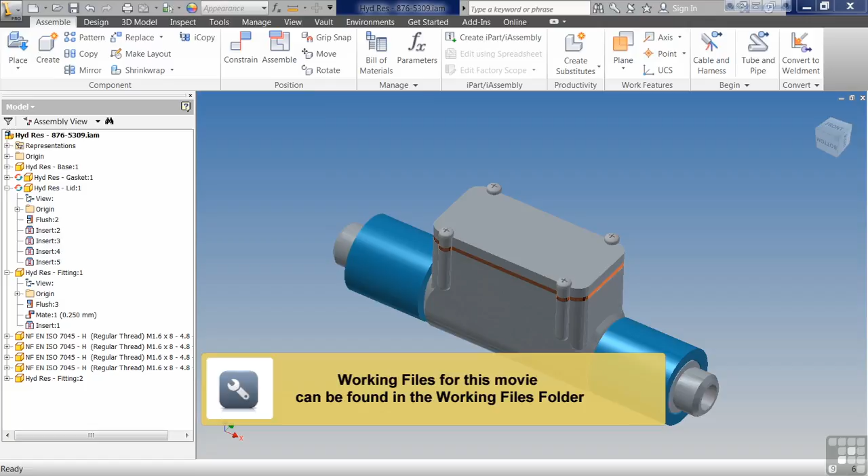In this exercise, we're going to start discussing presenting your assembly drawing. Now, this is one of the lessons that I love to teach, and I really like the fact that I get to teach this one online because it allows you as much time as you want. In the classroom, we have to really limit the time on this, and everybody loves it. This one, your spouse or your boss is going to be really mad at me because you're going to spend days just playing with this because it's so much fun to do.

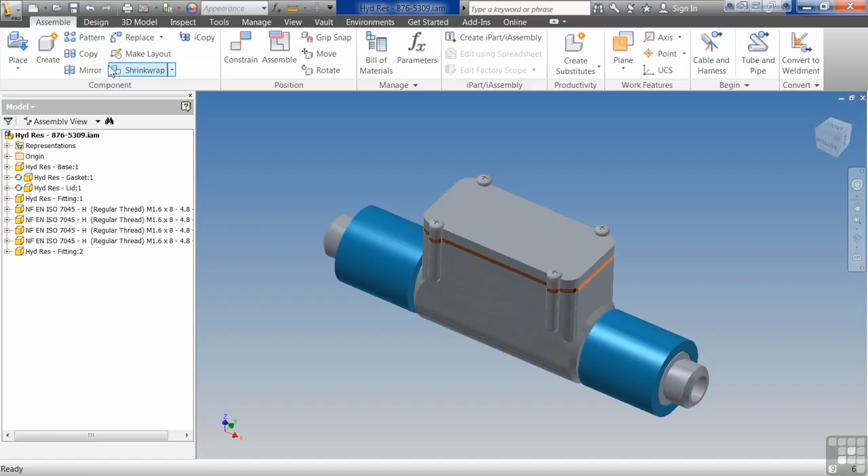So the first half, we're going to create a presentation view. Most of us know this is an exploded view. So I have this assembly open. I don't necessarily need it open, but I did want to show it to you before I do the presentation view. So I say new, and you notice down here I have a presentation or create an exploded projected view of the assembly. It's a standard IPN. Say create, and you see nothing in there.

So I come up and I say create view. And the reason I already had that open is because it highlights it for you. Makes it real easy. You could go out there and say open existing file and track it down and find it. This was created as a metric file. So I'm going to use the metric distances here. I'm going to say 50 millimeters. I think that usually does pretty good. That's about as good as the automatic one does.

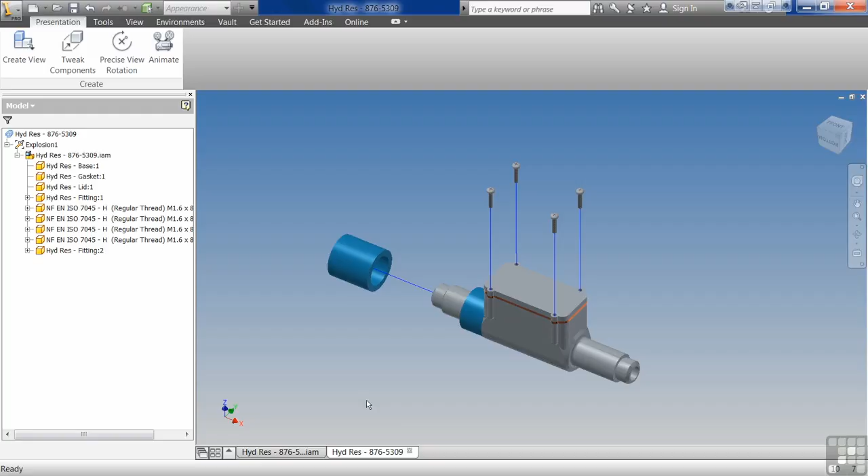Usually what I have to do is I start out with the automatic and I start modifying it. I start creating my own. This is super fun and super easy. If it does something crazy and you have a real complex machine, I don't even do the automatic. I'll put it in and I'll tell it, hey, I'm going to manually go through and edit all these. So you can start playing around and seeing what's what.

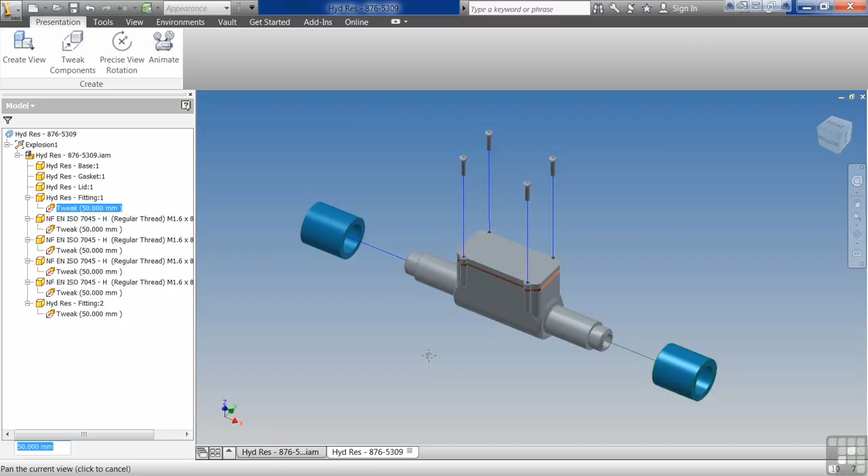If you expand these out, you see these tweaks. So I can start tweaking it. I can modify the existing tweak here, 50. You notice my lid here didn't go anywhere. So I can say tweak component. Left to right, top to bottom. So I'm going to start over here, and you can see how this is kind of an isolated box. So it's saying, hey, everything on this side, then go to this side.

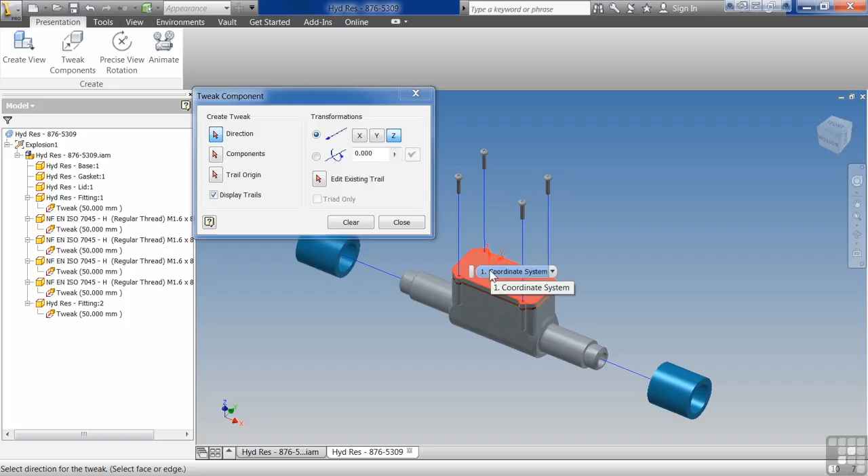So the first thing it wants is a direction. Direction doesn't necessarily mean that you need to pick on what you're going to be doing. You can come in here, you can pick this little line here. But what I found with this is flat surfaces work the best to give it a direction. So I want to go perpendicular to a flat surface. It highlights the Z direction.

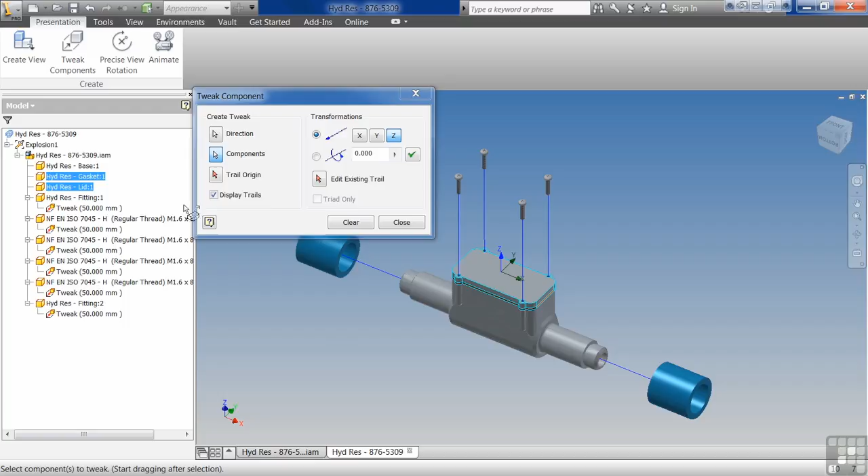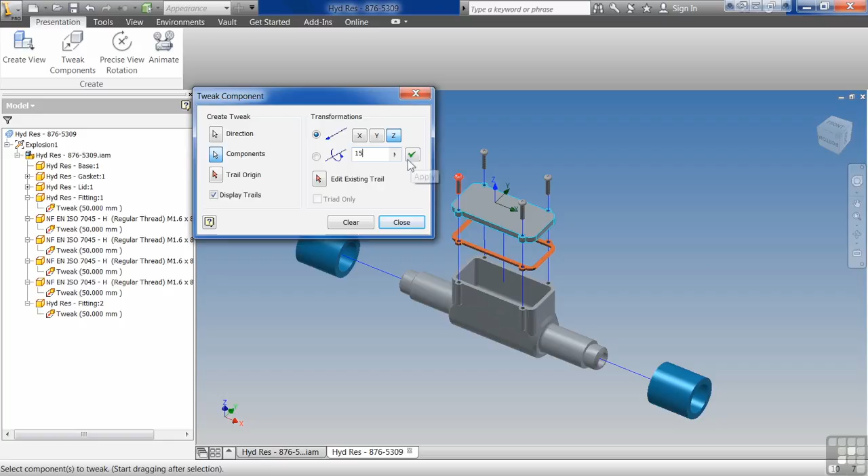Now it's asking for the components. Come over here in the browser, or I could select them here. I'm going to select the lid and the gasket. If I just come over in the empty space here, I can start moving this up and down. Or I can come right in here, tweak it, boom, it's where I want it. I hit clear, I can move on to the next one. Say that again. This time I just want the lid, 15 millimeters, and apply. You can see you can do a lot of things and get really creative.

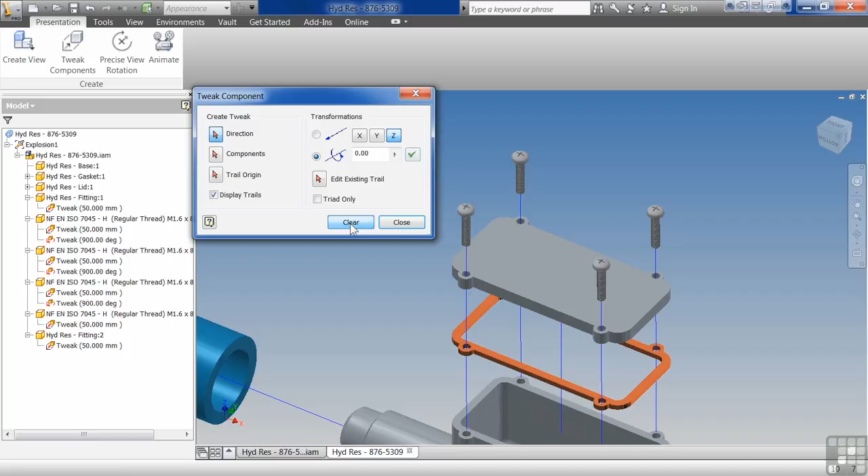Now we're going to add the rotational spin on these. So we're going to say 900 degrees. First thing we pick is the direction, then we select the component. We say we want to spin it 900 degrees. Then you clear, then you select the next one. Select the direction, then the component. Clear. We do that again. So we end up doing that for all 4 screws so that all 4 of them will spin as the lid comes down. This is a really cool effect that a lot of people really like playing with. So you can see you can create a really nice exploded view.

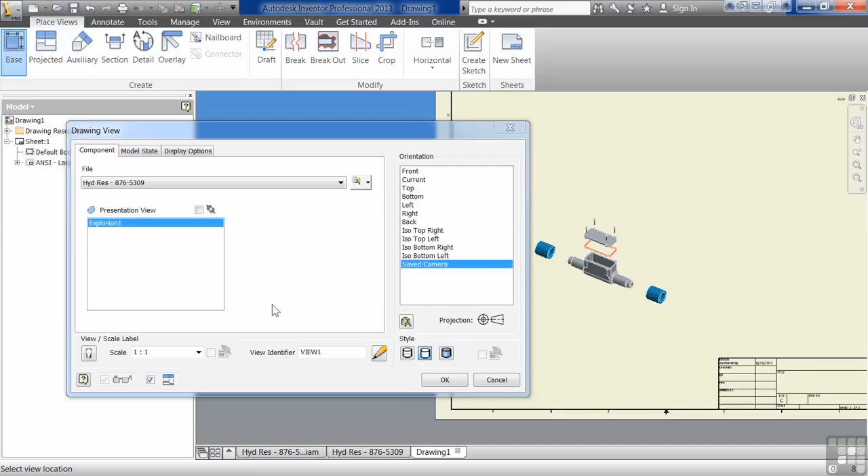Now what we can do with this is we can come in and we can put this on a drawing. A new drawing. Base view. Find the view I want here. And increase the scale. Drop it in there. It's asking me, what am I saving? I'm saving this hydraulic reservoir. And that is in Explosion1. Drops it in, we're good to go.

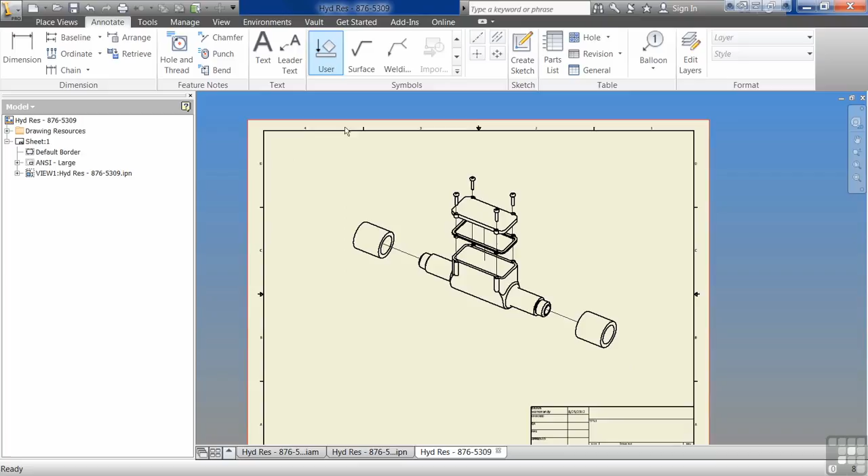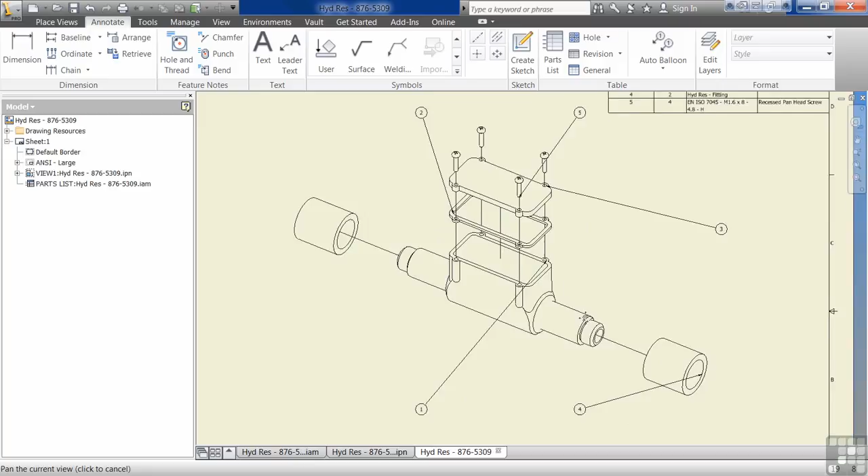Now I can start doing ballooning. I can do the automated parts list. I'm going to go back and show you the parts list and everything in detail. Here's the 5-6 parts. Come in here and say auto balloon. All these components. Place it around it. And see, I've automatically created this balloon list of everything I need. Now, it may not be in the exact place, and we'll get into details of how to clean that up.

But you can see from that, I can create these just wonderful drawings that are good for catalogs. They're good for assembly instructions. They're great for shop floors when you want to show all the internal parts. So you can see it's just a wonderful way to present your drawing to people and show them how something goes together and show them the inside of something.

So take a look at this. It's real powerful. Make an exploded view, get something close to this, and then save this. It's going to be the hydraulic reservoir 876-5309.IPN. That's what it'll end up saving it out as. And we'll use this in another exercise.